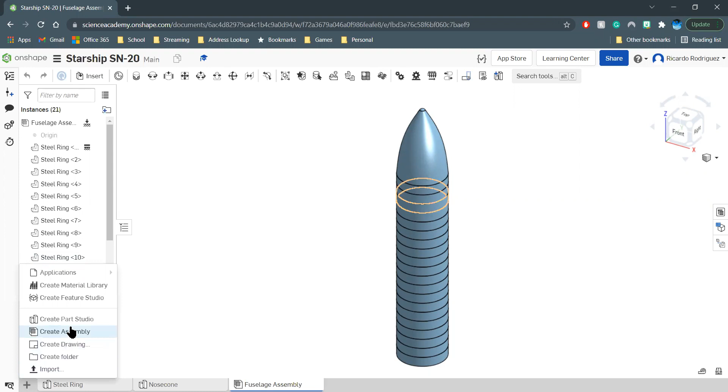In this video, we will be talking about how to create brackets. So let's get started. Once we're into the project file here on OnShape, we'll go ahead and create a new element and click on Create Part Studio.

The first bracket that we're going to be building is the aft fin bracket. Let's go ahead and begin by sketching on the front plane.

Once we're in sketch mode, we'll click on the front so we can see this in full view, and I will go ahead and create these dimensions. Start at the origin going up. We'll put the dimensions first, then make them parametric. So this one will be 18.3 centimeters.

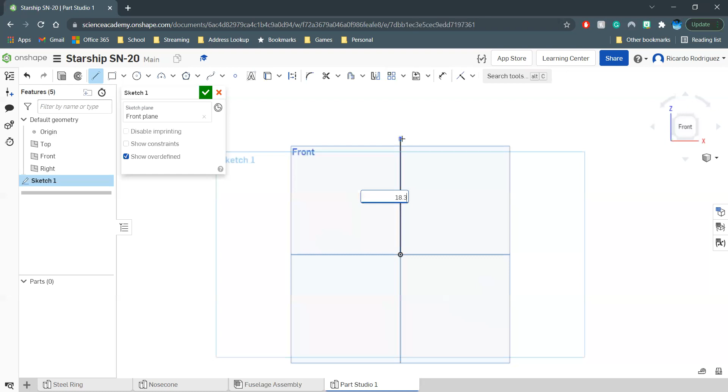Okay, so it's a little bit longer. Let's zoom out. Going to the right, this one will be 0.45 centimeters. We're going to have to zoom in because there's small detail there.

And we're going to make this one at an angle. I'm not too worried about the dimension because we're going to have to redimension that with a vertical height. So don't put a dimension there. Going to the left, if you want to put a dimension, that's fine.

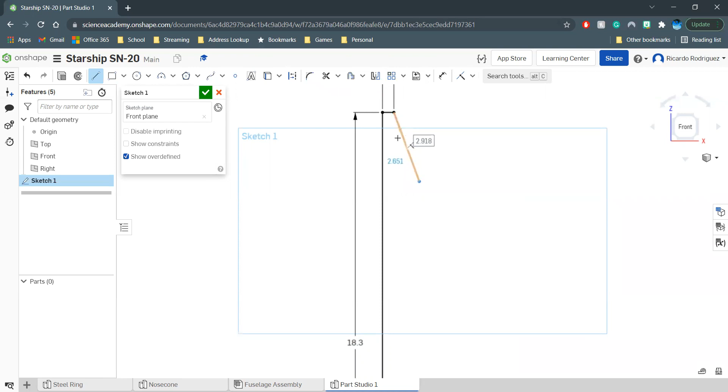I will go ahead and make mine vertical to that yellow point on the top. So if I'm moving this to the left and you see that yellow construction line, you can click so that it's one less dimension that we're going to do. That puts it vertically on top of that 0.45 line.

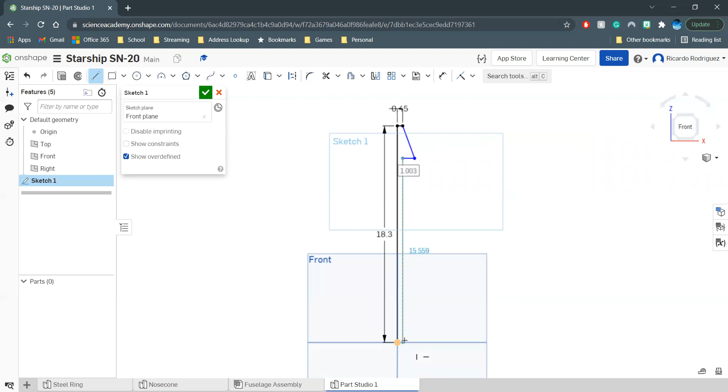I'm going to go down and make it horizontal right here to our origin. I'm going to click and then click it again. You can see that dimension is going to be 0.45. So that's one less dimension that I have to do.

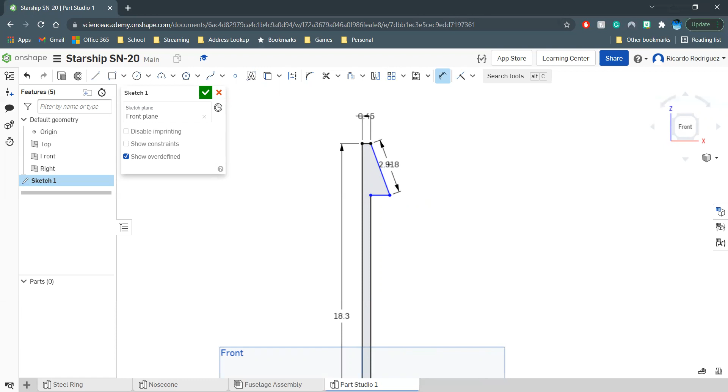Next, we'll create that dimension from this point to the top right point. When I click from point to point, it gives me the option for horizontal, vertical, or aligned dimension - I think it's called aligned dimension, not too sure - but we'll make this vertical since I do have that dimension. That one will be 1.83.

There's going to be one more dimension that we're going to make, right below it here. Let's put our dimension outside because we can't see it inside. This one will also be 0.45.

So now that we have our shape, what we need to do is create the dimensions parametric. Let's start with the first one. This one will be hashtag ring height.

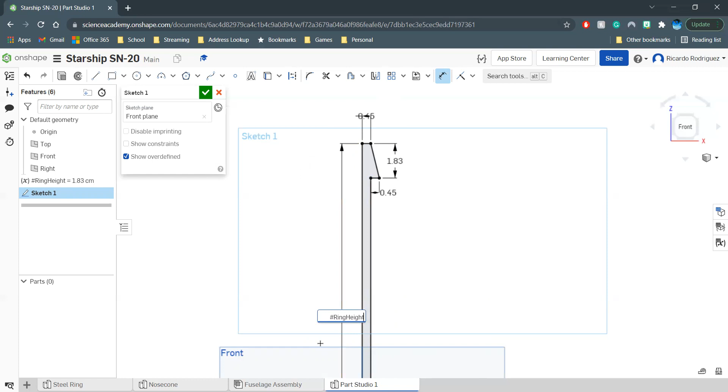These are going to be dependent on the height of the rings that we made for the fuselage. We'll press enter. So it's not going to be 18.3, it's going to be 1.83, and for it to give us 18.3, we'll have to multiply it by 10. We'll do that on the equation part - press enter, enter. This is the equation part, so it is 1.83 times 10. Go ahead and put that asterisk, times 10. Press enter, and we'll see that we do have the right dimension there.

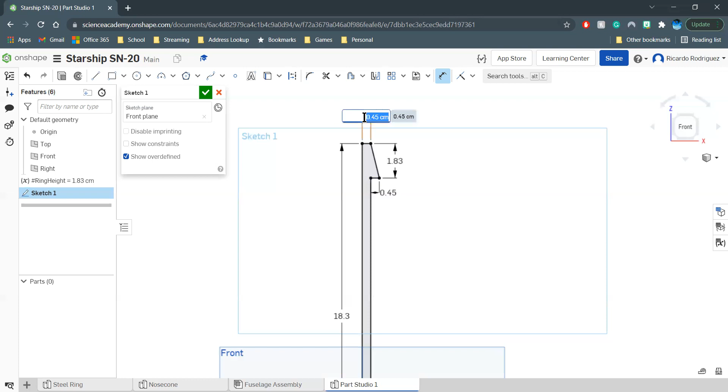This one over here, on the other hand, is just 1.83. So we can say this is hashtag ring height, and press enter. This one on the top will be dependent on a different variable, so we'll create hashtag F diameter. Press enter - the F diameter is equal to 9.

So what do we have to do to make it 0.45? Divide by 20. Press enter - good, so that is 0.45. Let's dimension this also, so it's going to be hashtag F diameter divided by 20, enter.

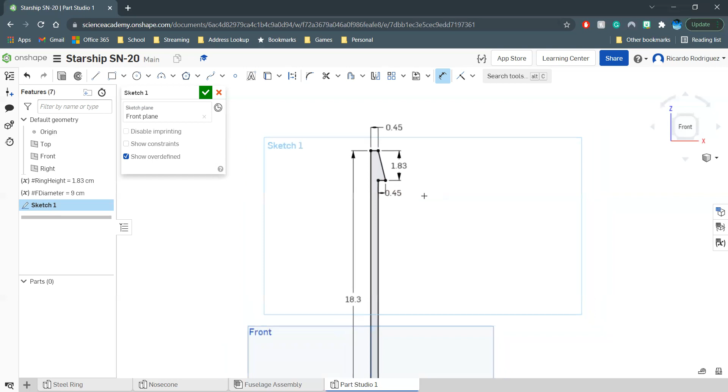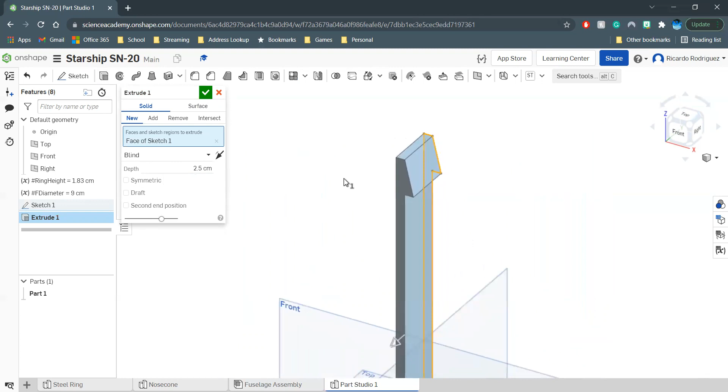Okay, so all the sides have been parametrically modeled. I'm going to finish my sketch, and I will go ahead and extrude the shape that we just created. Let me put this in isometric view so we can see what's happening in 3D. I want this part to be symmetric, meaning it's extruded to the front as much as it is extruded to the back. So I want you to see what happens when I click on symmetric - it's half to the front, half to the back.

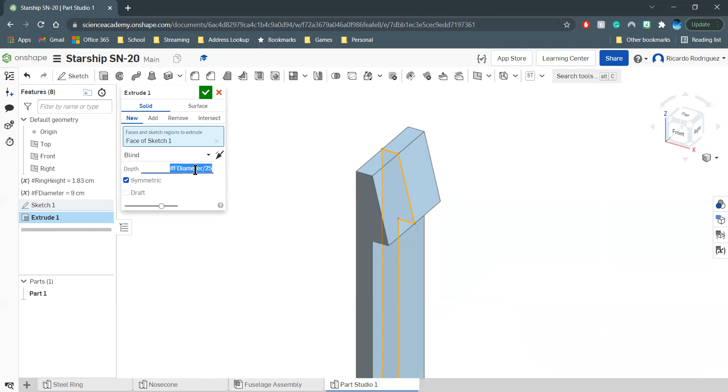This depth right here is going to be based off of the F diameter, and it's going to be divided by 25, I think - let's check. Yes, so it's F diameter divided by 25.

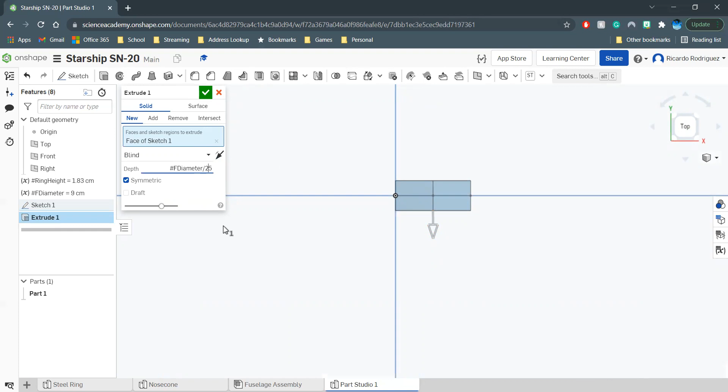So let's check the top dimension. Well, actually, it might be a little too thin. Let me check, maybe it was divided by 10. Let's double check that real quick. Actually, it was divided by 10, so go ahead and make that correction.

It's really easy to just go back and double click and make sure that it is F diameter divided by 10. So we're going to have a little square here, and that's what it looks like. Okay, we're done with that extrusion.

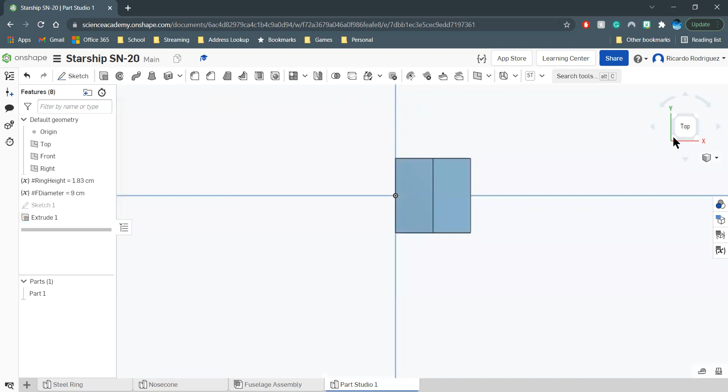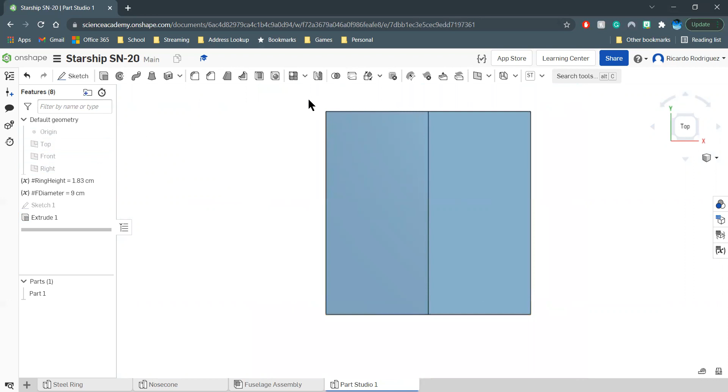Let's go back to our isometric view. That looks perfect. We can go ahead and turn off the origin, top, front, right, and we'll make a few modifications on this too. Let's start with the top view. If this part is going to be joining the fuselage, it does need to have that curvature here so that it fits very snugly into the fuselage or into the ring.

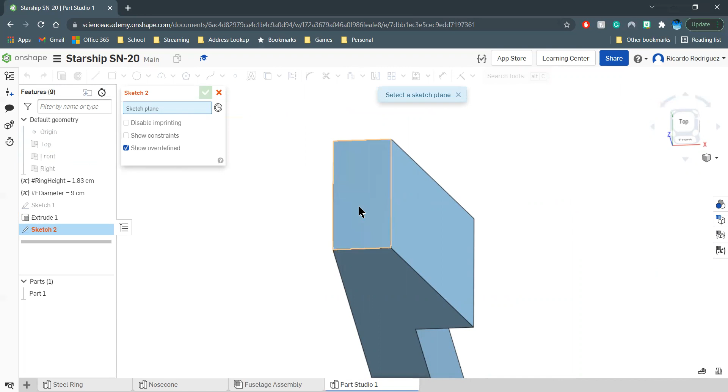So I'm going to go ahead and start a sketch here on the top part of the object. Please make sure that you're clicking on top of the object, not on the top plane. That's a no, not this one. Click here, there we go. So once you have that, we're going to be sketching here. Let's click on the top view.

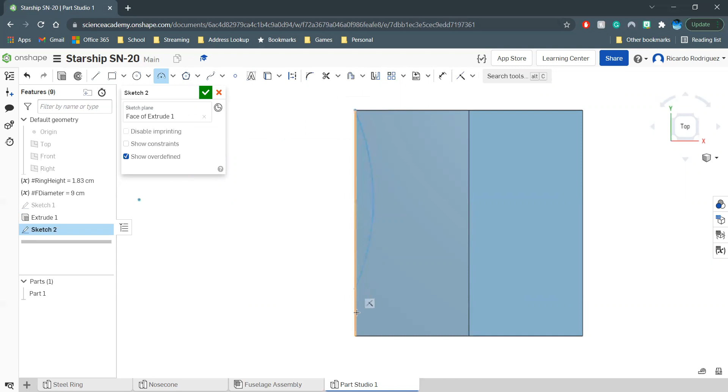All right, and we're going to be making an arc. This is called the 3-point arc, and we're going to start at the top left, then we're going to click on the bottom left. And now it's just a matter of what is going to be the curvature here.

Now the diameter, which is F diameter, is 9 centimeters right now. But the measurement that you're getting right here is the radius. And you know that if the diameter is 9, then the radius is half of the diameter. So this distance that we have right here, F diameter, is 9, but this is asking for a radius.

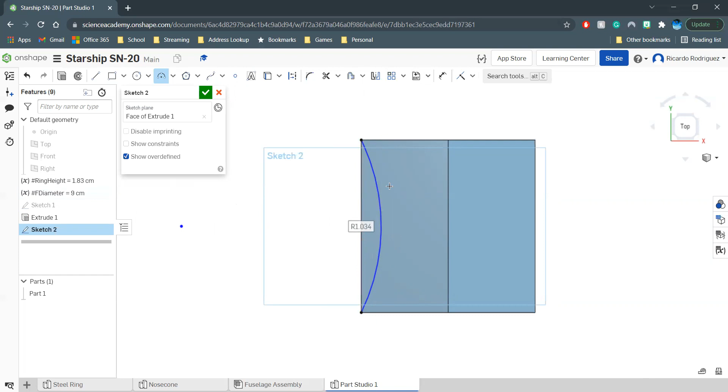So what we need to do right here... that always happens when I try to put a hashtag. Let's go to the top view again, and let's click on dimension. Zoom out, click. Okay, this is going to be F diameter divided by 2 because it's a radius, it's half of the diameter.

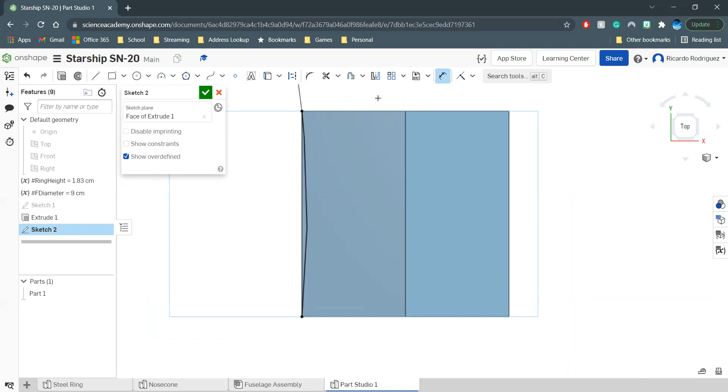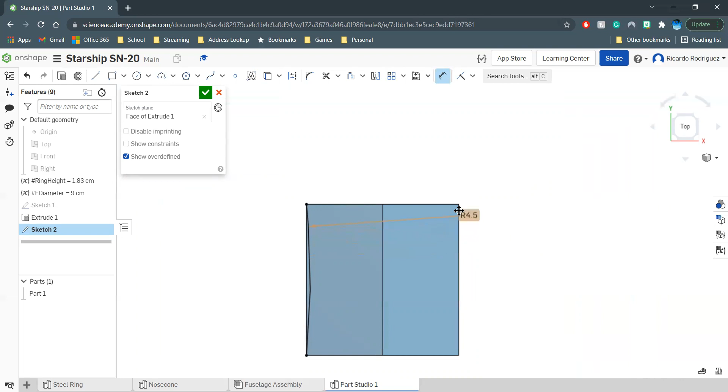Press enter. We're going to have a really thin sliver of the part that we're going to have to cut out. So if the dimension comes out over here, you can just go ahead and move it. It's not necessary, but I'd like to keep my dimensions close to my objects, just like that. It's even better if you keep it outside of the object, even if it means creating a little extension line, but I don't want to put any dimensions inside the object.

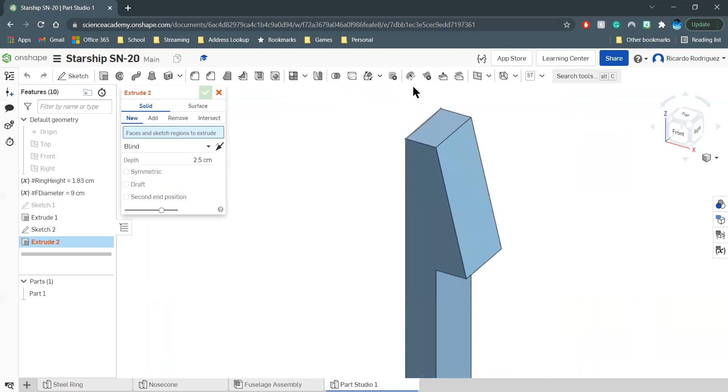Okay, let's go ahead and finish this. And what I'm going to do next is I'm going to use extrude. Let's click on isometric view, and let's really zoom in right here so that we can click on this part right here. Now I want to extrude new, as you can see right here, but we want to remove.

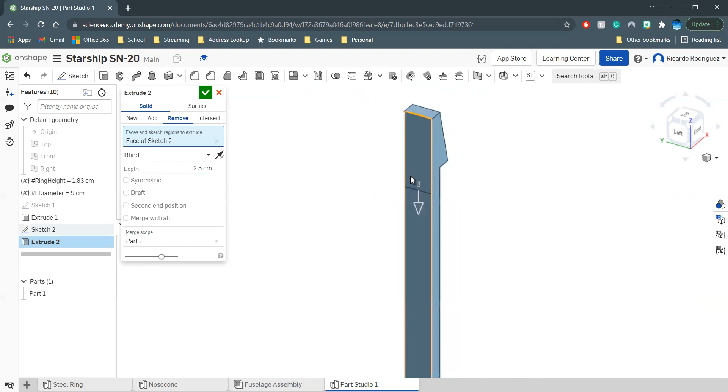So if we check the other side of our isometric, this part is being cut out. It's a really thin part that's being cut out, and we want to remove this through all. So this is going to be cutting it all the way from the top to the bottom. Click on the check mark, and we're almost done with this part. You can see now it has an arc, and that's going to fit nicely into the fuselage.

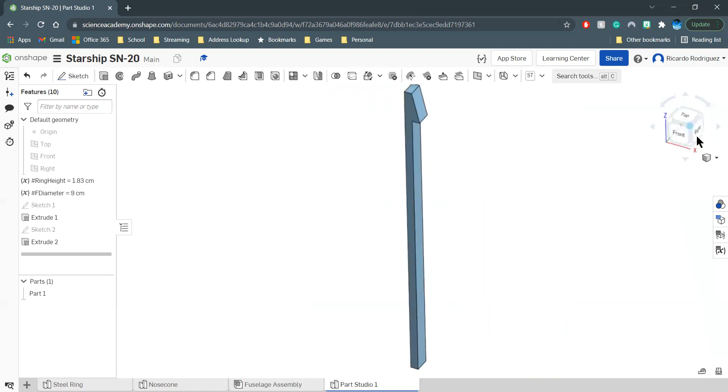Next, I'm going to click down here between the front, right, and the bottom view, and we're going to make a little sketch here on the bottom. So I'm going to click it, and I'm going to click on sketch. Let's click on the bottom. And what we're going to do is we're going to put a hole. It's not a hole that goes all the way through, so it does have a dimension.

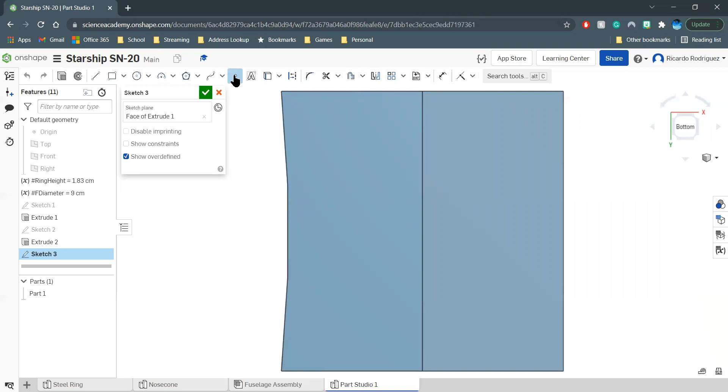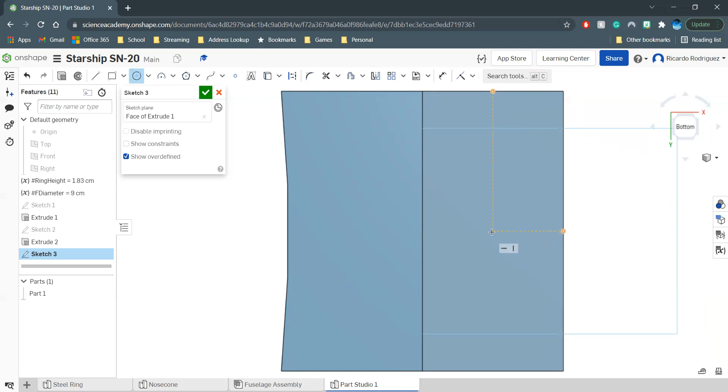But first I want to put some markers which are midpoints. I'm going to find the middle, there's the top middle, and I want to find the middle on the right side, there it is. And I'm going to create a circle. So if I find this point right here, you can see that I'm projecting to the top. And if I find that one, it's going to find both horizontal and vertical alignment, so that's just going to save me a few clicks.

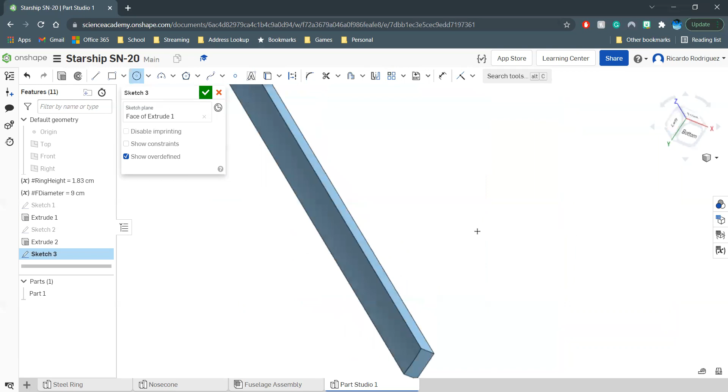If I find the top and the right side middle points, I can click here, and then I can dimension the circle to whatever I want. Okay, now this dimension... hashtag, nope, see, it does it again. Let's go back over here again.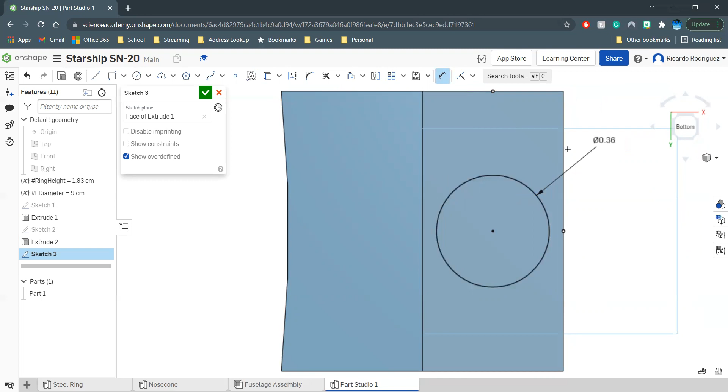Okay, let's click on the bottom. Let's click on dimension. All right, so this one's going to be hashtag F diameter, and this one will be divided by 25. Enter. So that's going to give us 0.36. Now, how much does that extrude in?

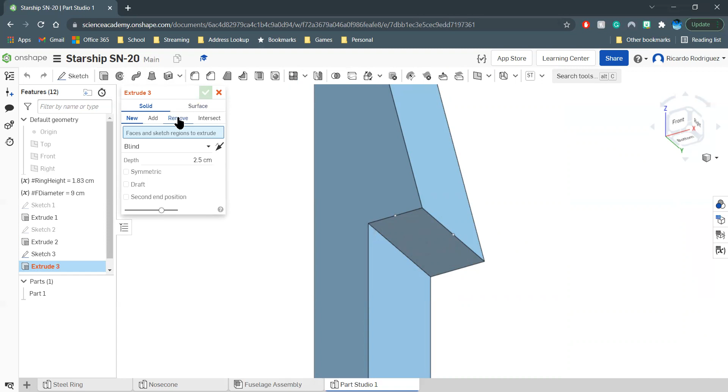Okay, the extrusion that's going to be made, let's finish the sketch first. And now let's click on extrude. Okay, make sure that you click on remove. And we're going to click on this circle.

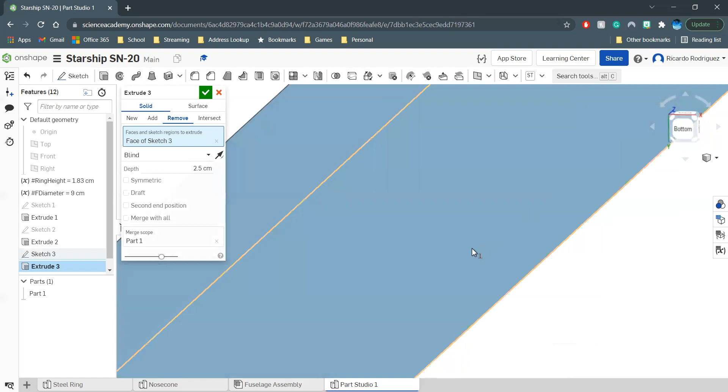And click on the bottom. Okay, just please remember, it's not going to go all the way through. Wow, that really zoomed out. Not bad. Okay, let me try that again. Here we go.

This is going to be hashtag. Let's try. Let's see. 1.83.

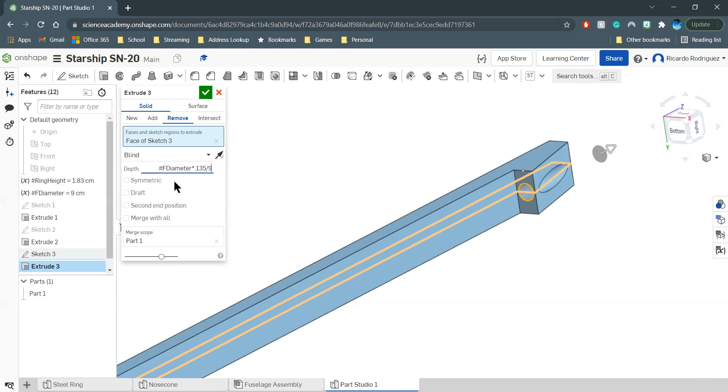Okay, so this dimension has to be 0.135. So it's going to be F diameter times 0.135, and then divided by 9. 0.135 divided by 9. Press enter again. If we go back to the extrude, that should say 0.135. Okay. Press the check mark.

And what we're going to do, just to make sure that it is okay, we're going to check the mass properties. And if you click on mass property of this object, you should see 7.521. So if you have that dimension, then you're doing okay.

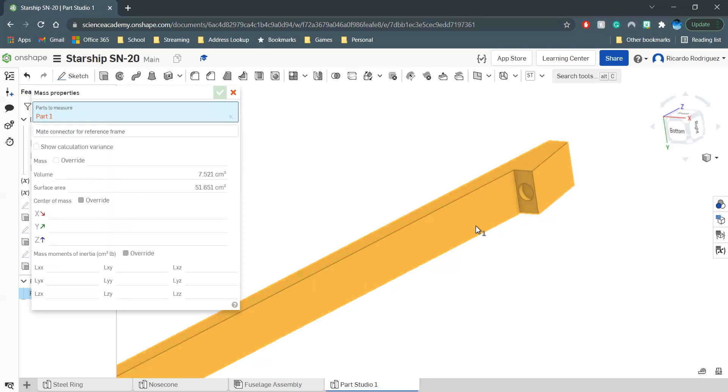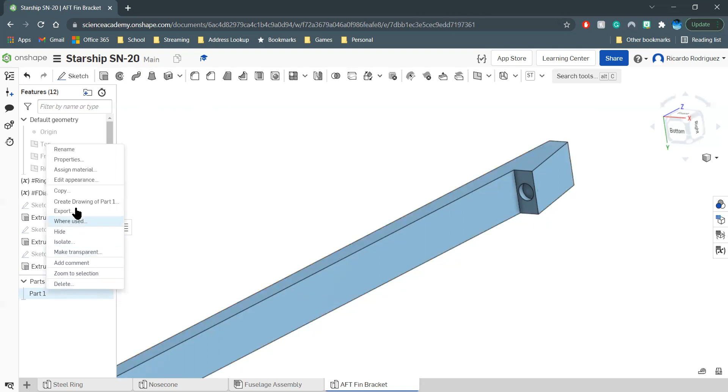Let's close this part, and we're going to rename this. Right-click, rename. So this is going to be the aft fin bracket. So these are the brackets that go at the end of the rocket. And you can also rename it here. Right-click, rename, aft fin bracket. Okay, very good. So we can put this in our home view, and it's already saved. Okay, so this is good.

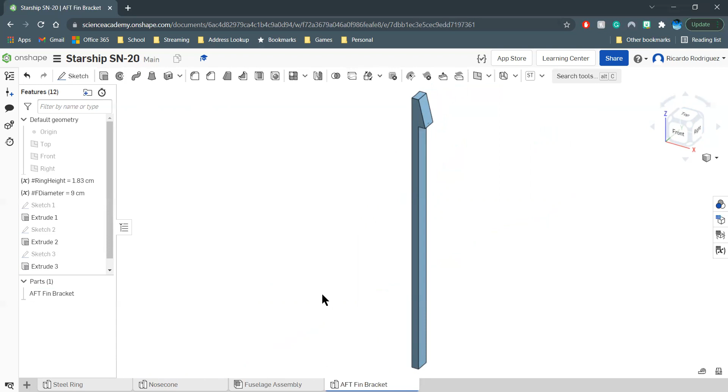Now let's go to the nose cone so that we can make the forward bracket. So the forward bracket, I'm opening the nose cone. So if you haven't done the nose cone yet, you might want to stop this video and start making the nose cone first. But if you have the nose cone, just go ahead and open it, and we're going to continue from here. The first thing that we're going to do is we need to create an offset plane from the right.

So you can go ahead and turn the right on, or you don't have to, but if you feel more comfortable creating this plane first, you can do that. So I'm going to click on plane, and it's going to be offset from the right side plane. You can see how that starts moving to the right. The offset distance will be 5.5 centimeters.

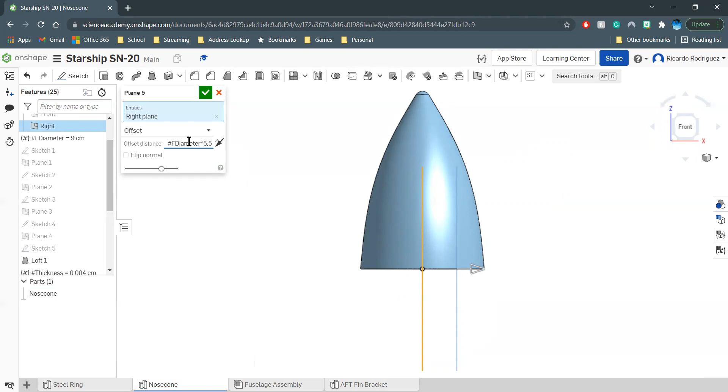Okay, or if you want to make this into parametric modeling, we can click on hashtag F diameter times 5.5 divided by 9. You can press enter. So if I go back to check plane 5, it should say that it is 5.5. And the reason we didn't have to worry about making a new variable is because the nose cone already had that variable. If we check on the top left, it should say F diameter. So that plane has been offset by 5.5 centimeters.

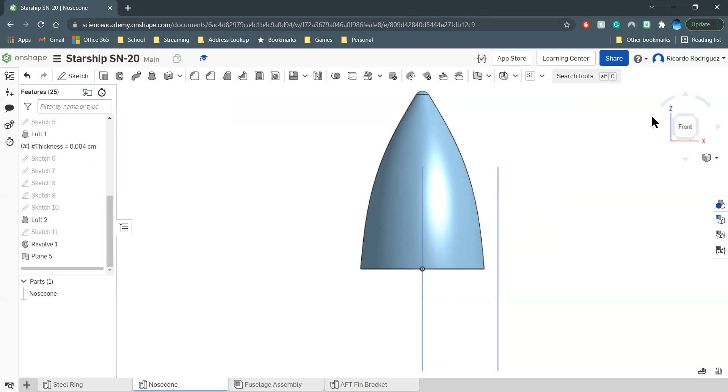All right. Now I'm going to sketch on plane 5. Click on the right plane. We're going to make a little rectangle here. So you can click on rectangle. And this rectangle is going to be, the top is hashtag, keep doing that, F diameter, turned it around to the back. Need to start clicking D for dimension.

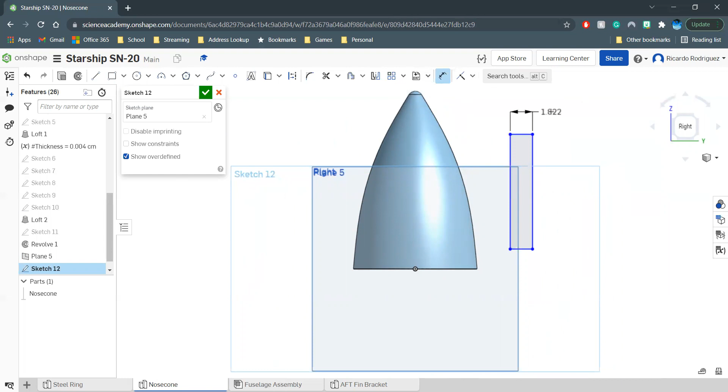Okay, so this dimension right here, it's supposed to be 1. So it's going to be hashtag F diameter divided by 9. Press enter. And this one right here will be F diameter times 11 divided by 9. Okay, so it's a long rectangle.

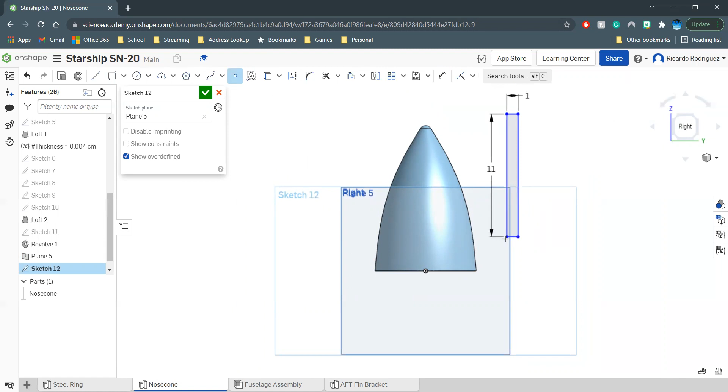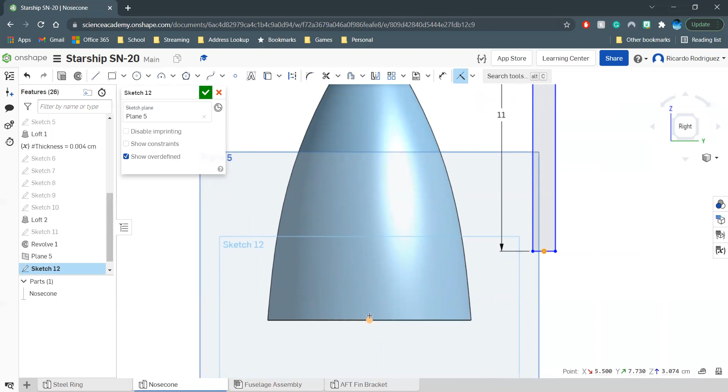We're going to find the midpoint. So if you click on point and find the midpoint right in the middle of the bottom of the rectangle, there it is. And we're going to constrain it to this origin point. So if I click on coincident, click on the middle of the bottom rectangle, and then click on your origin. So you have to like zoom in a little bit and make sure you're not clicking on the line. Make sure you click on the point. So you might have to move your mouse up a little bit. So right here. When you do that, you should see your rectangle is all black. That means that you have fully constrained your sketch. So we're going to click on finish.

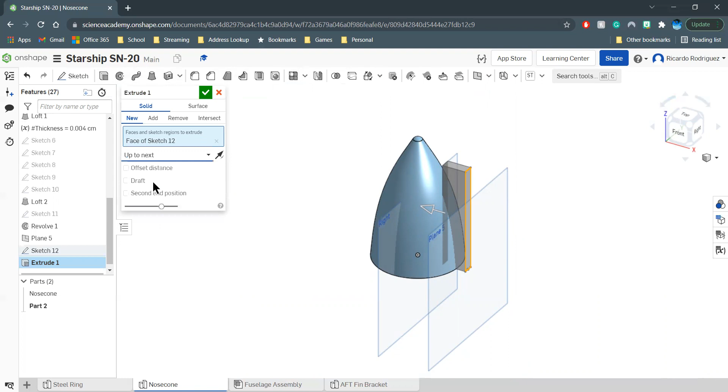We're going to go back to the home view. And now we're going to click on extrude. So now I have to click on this rectangle. It wants to go the other way. And I say, nope, it's going to be going the other direction. And the depth is going to be up to next, so it's going to find the next part. So as soon as I do that, it wants to add it to the previous part, and so I'm going to have to say no. I want a new part. So I'm going to click on the check mark.

So you can see that it has a different color—it's in gray because I added a new part. So now we have the nose cone and we have a new part.

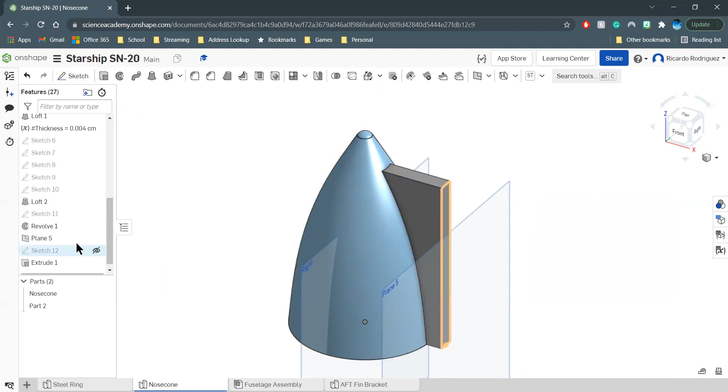I will turn off the right plane and plane number 5. I can just click hide it—may have to scroll up to find the right plane. Okay, that leaves it a little bit cleaner. I'm going to turn off the origin too.

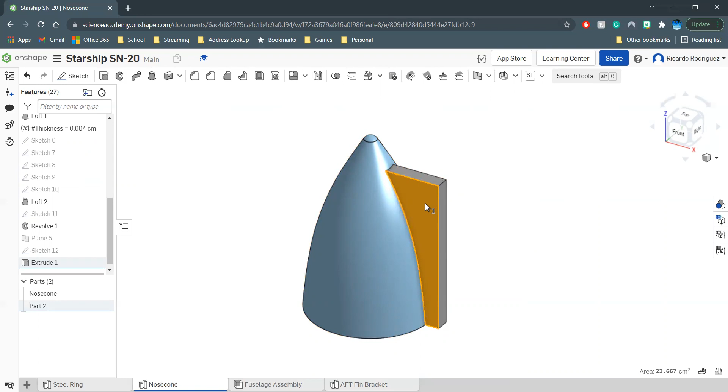Perfect. So the next thing I need to do is sketch on this part of the new object. Click on the sketch. Okay, and we're ready. Click on the front and let's go ahead and begin.

I'm going to start using the line tool, and I'm going to start right on the bottom corner. This is going to go up somewhere around here, then it's going to go to the right somewhere around there, and then it's going to go up again.

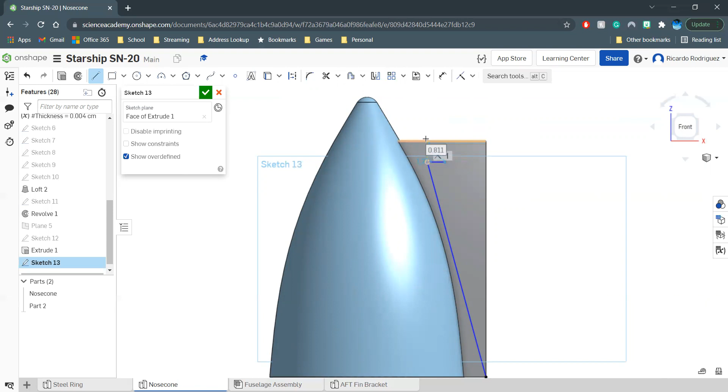Please make sure you don't constrain it to anything else. If you see that you're creating a yellow line constraint, don't do that. Just make sure you click somewhere else all the way up to the top line. That's the only yellow line you want, not the vertical dotted line you see here—you don't want that. So click somewhere else on the top line.

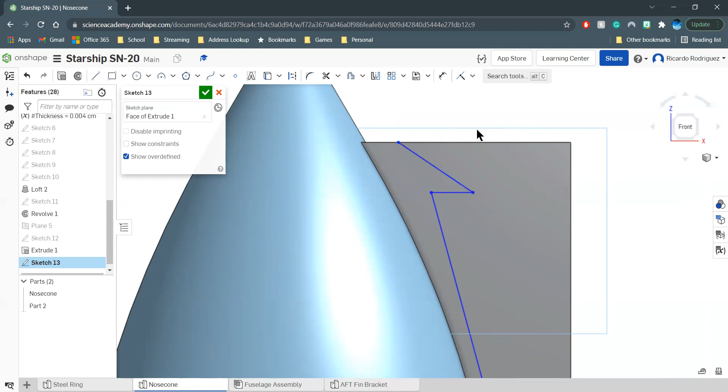Perfect. I'm going to press escape so I can exit the line command, and now I'm going to be putting in some dimensions here. So hit the letter D for the shortcut.

So from here, from the top right corner to the top of this blue line, this is going to be 3.5. I'm just going to click hashtag F diameter, and it's going to be times 3.5 divided by 9. Perfect, 3.5.

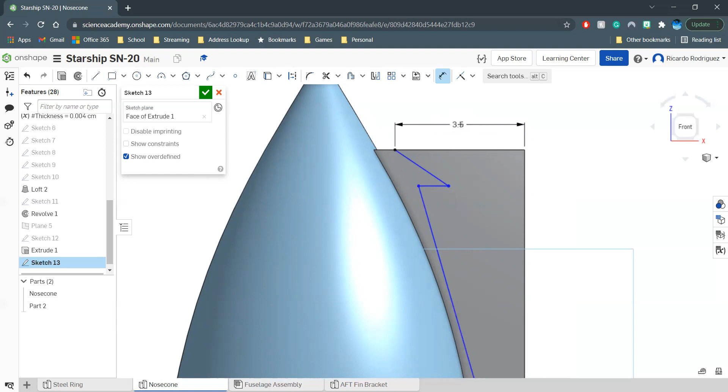Next, I will click from the bottom right point to the middle of the object that we just created. Make sure that you don't have this crooked dimension line—this is going to be a vertical dimension, just like that. Make sure your arrows are up and down.

Click. This will be 10 centimeters, so it's going to be hashtag F diameter times 9 divided by 10... or you could have put times 0.9. Actually, it should have been the other way: 10 times 10 divided by 9. Yeah, it's always good to check. So 10 divided by 9. There we go, 10 divided by 9. That should give us 10 centimeters.

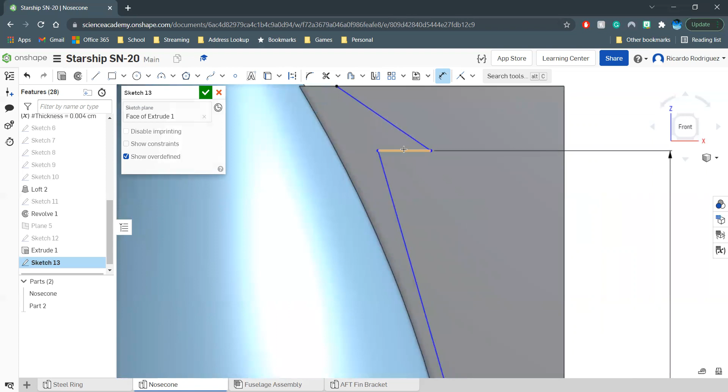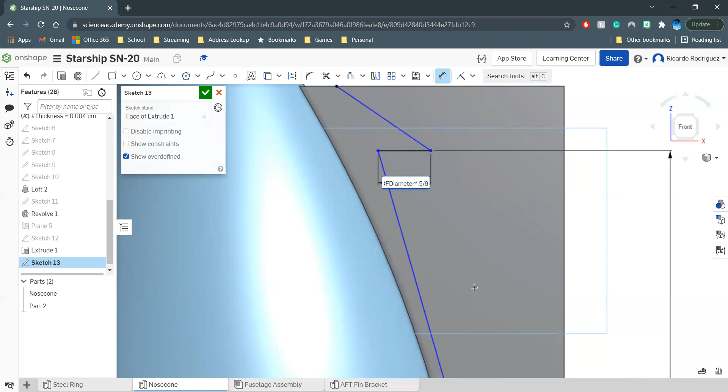We have one more dimension that we want to do, and then the other ones are going to be angles. So right here, you can click on the line. Since it's just one dimension that we need, this dimension will be 0.5. So hashtag F diameter times 0.5 divided by 9. Press enter, that should give us 0.5.

And now let's work with angles—let's put that dimension here. We're still under the dimension command, and we're going to click here and here. This one will be 15 degrees. As soon as we do that, you can see all these lines are going to turn black, which means everything has been fully constrained.

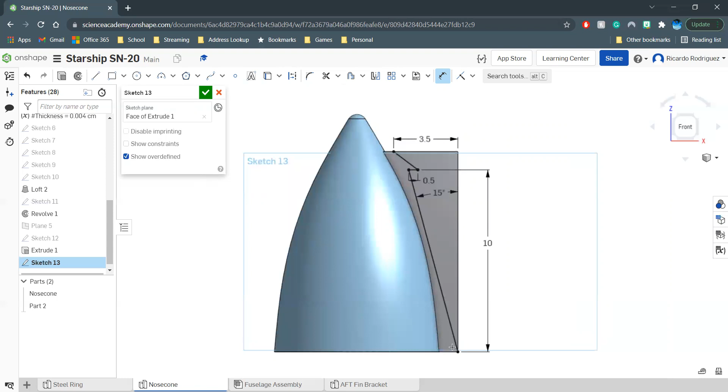We want to do one more thing. Down at the bottom, because there's a hole that's going to go straight all the way to the top, we want that hole to be on a flat surface. So we're going to make one more little adjustment to this. I need you to find where the midpoint is—using the line command, I clicked on line and found the middle, okay? And then just click somewhere here.

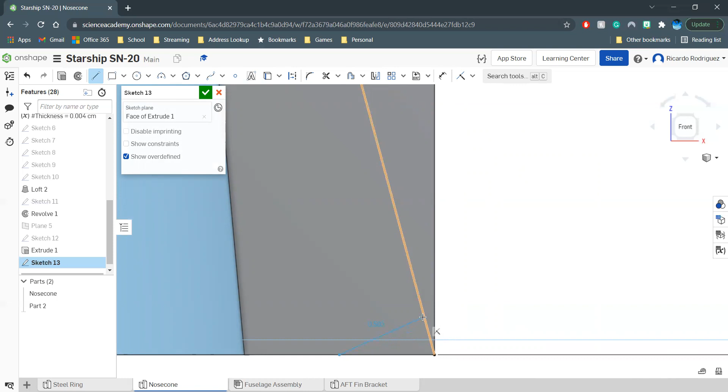You see this? It finds the point that's perpendicular to it. Let me zoom in a little bit more—you see a point that's perpendicular to it. If you don't find that perpendicular point, that's fine. You can just click somewhere else and then make this 15 degrees, like that.

Let's click on dimension. If you go from here to here, you're going to be able to select that and make it 15 degrees—it would have been the same thing. But if I try to dimension from here to here, you're going to see how that's like 90 degrees. It's just going to be a driven constraint, which means I won't be able to do anything with it—it's just for reference. You can call it a reference dimension or a driven dimension.

Okay, again, you don't have to do that dimension. I just wanted you to see that you do have 15 degrees whenever you put this at a perpendicular angle.

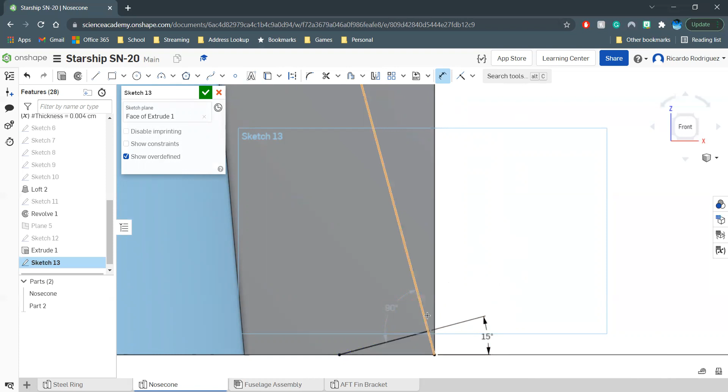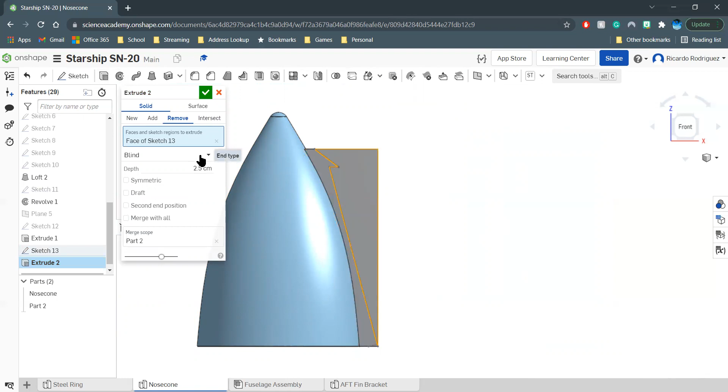Okay, so we're almost done. We're going to click on the check mark, and we have two shapes that we need to cut out. The first one is going to be extrude, remove, and we're going to click on this outside part. So when you're removing, make sure that you click on through all, so it knows that we need to remove all of this portion of the bracket.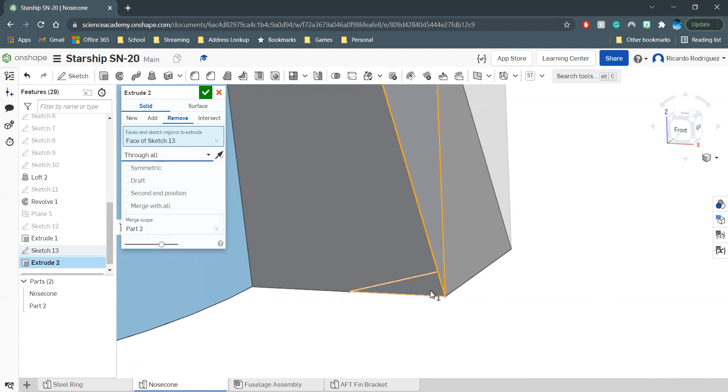Another thing you need to do is you might have to zoom in so you can remove this bottom little triangle. It's really important that you do this, otherwise you're not going to be able to complete this correctly. So make sure that you remove this bottom little triangle and this big shape on the right side.

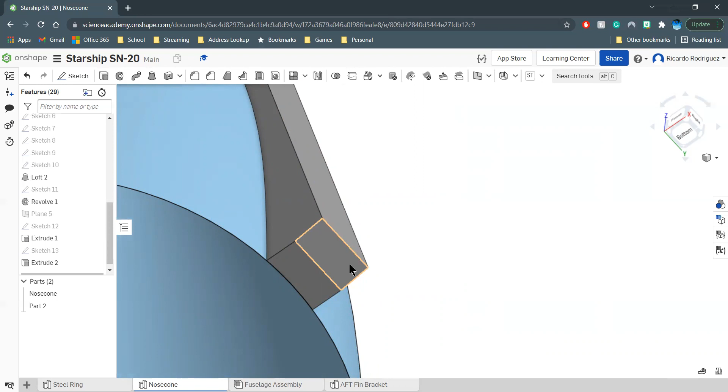So I'm going to click on the check mark. We've removed it. What we need to do next is take a look at the bottom. We have two rectangles: this one with a little arc, and the one on the right, which is just a rectangle. We want to sketch here on this corner, so click on that and then click on sketch.

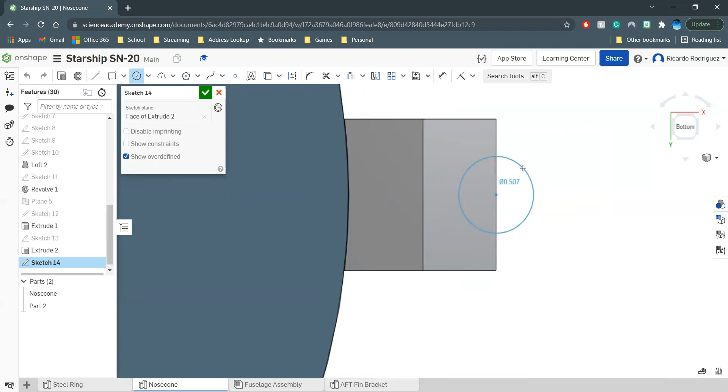What we're going to do is just click on the bottom to make a circle. Now make sure that you start the center right on the edge, right here. This circle will be 0.5.

Let me click on dimension first this time - D for dimension, click on the circle. So this circle is going to be hashtag F diameter times 0.5 divided by 9. Enter.

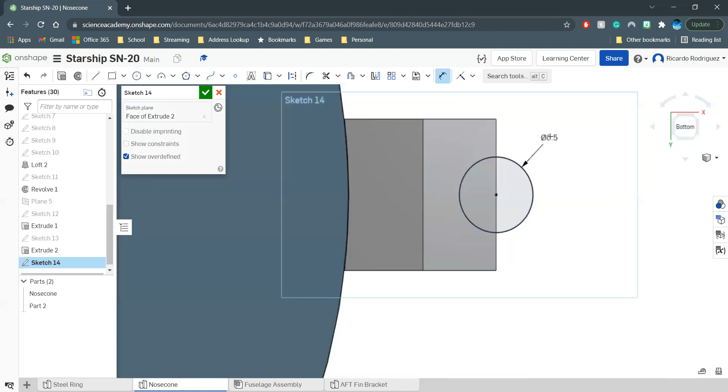Okay, perfect. Now I can go ahead and finish the sketch. We can do the extrusion. Make sure you click on remove. If you only click on this half of the circle, it's only going to go up to a certain dimension, so watch what happens. Let's do the depth.

10, hashtag F diameter times, this is going to be 10.35, divided by 9. Press enter.

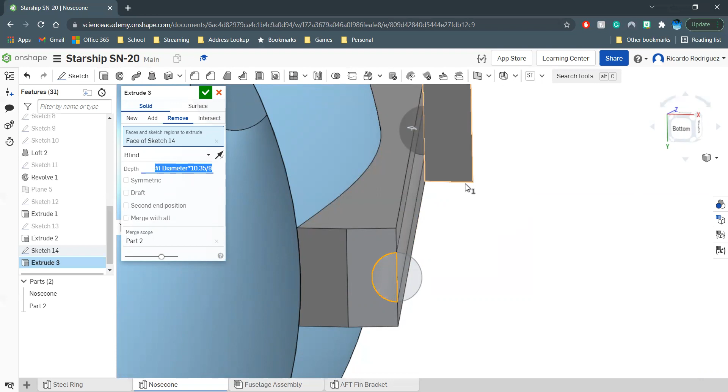So you can see how that's going to go in, but it's only the inside circle, so we don't want that one. We want this one also. So when I click on this one too, you have to select both semicircles so that circle hole can go all the way through.

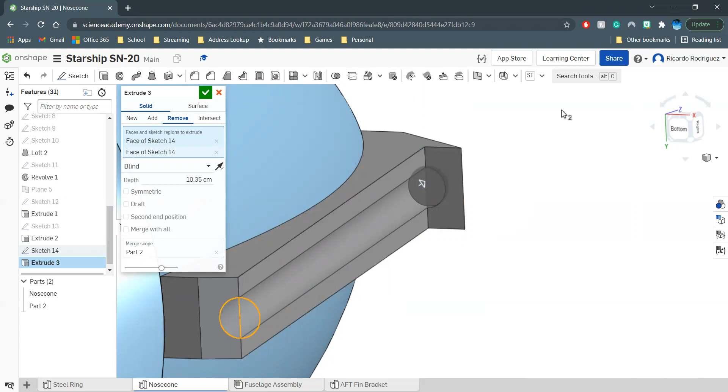If we check it from the top, let me zoom out right here. You can see how that's going to get really, really close to coming out right through there, but it's just the perfect size.

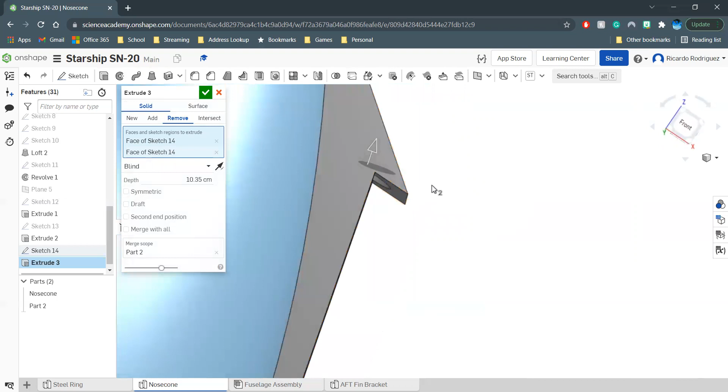So we don't want this hole to go all the way out because we don't want to create any holes on this bracket. Again, this depth was F diameter times 10.35 divided by 9. Check. Okay, it's looking pretty good.

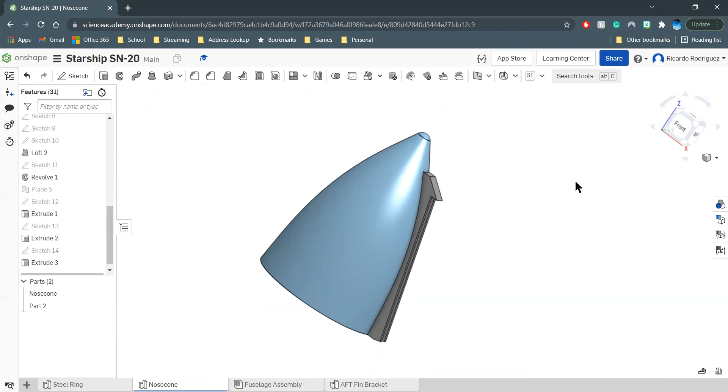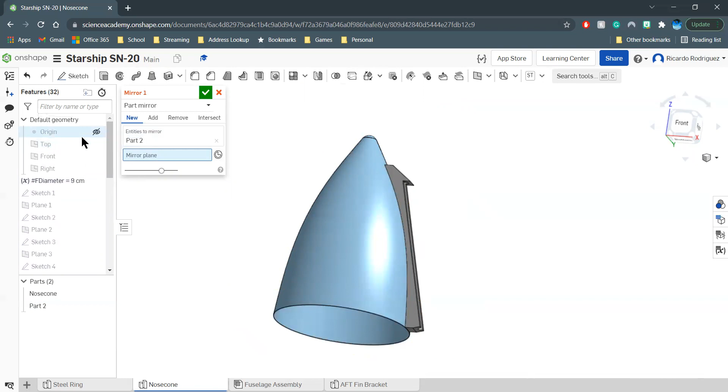I think we have what we need from this forward bracket. Now what we need to do is make a copy of it on the other side. So how do we copy something? We make a mirror and select the part we want to copy. Then we click on the mirror plane, and the mirror plane is going to be the right plane, so this is sort of like the mirror image. When we click here, the other side appears.

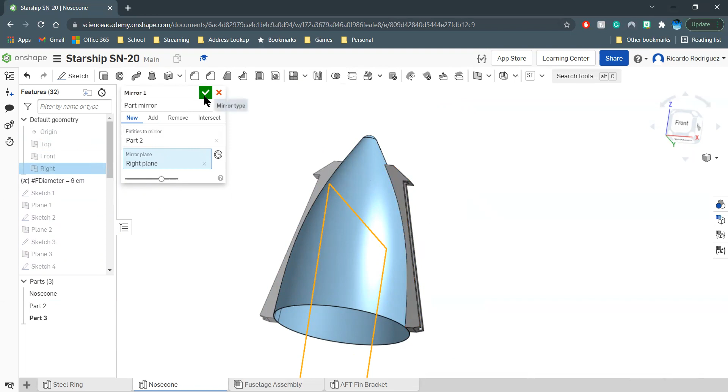Please remember that you need to click on new. For some reason it turns it back into adding material - we don't want that. So we've added the new part. We click on OK, check.

We still have our nose cone with two gray brackets. I'm going to go ahead and rename that here so it doesn't say just part 2. I'm going to rename this one - this is the right forward, FWD, I'm going to keep it short, fin bracket. And then part 3, I'm going to rename that left forward fin bracket.

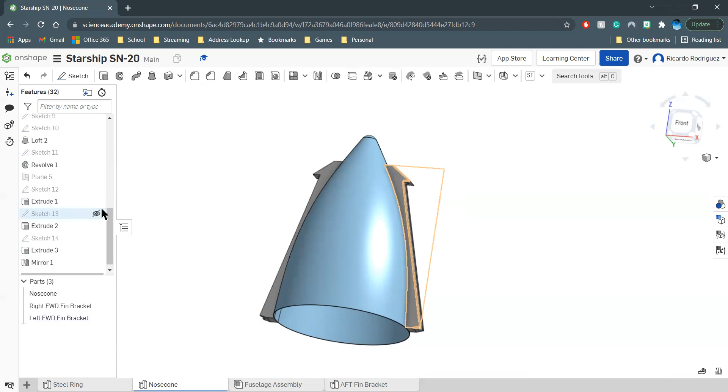Okay, so this is it. If you can just check what the mass properties is by clicking on that fin bracket, if you get 5.076 centimeters cubed, then you did that part right. Of course, if I click on the second one, it's just going to be twice as much, which is 10.152.